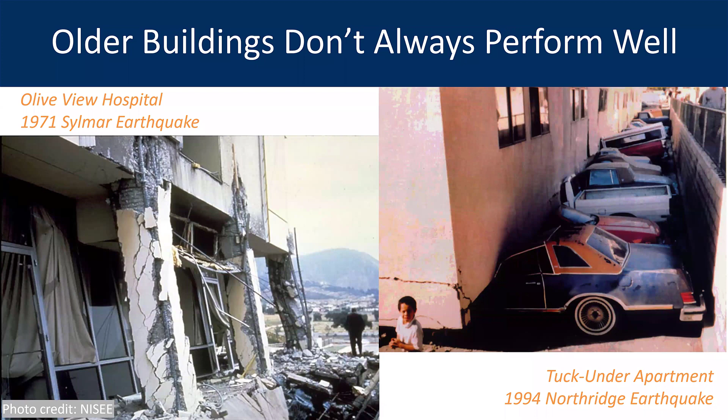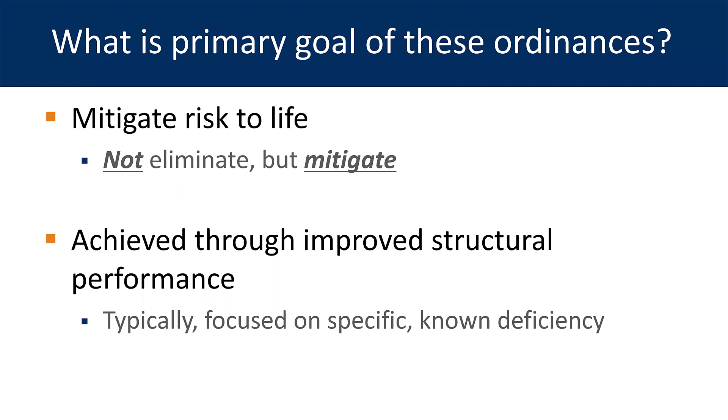The primary goal is to mitigate risk to life. It's not eliminating it, but reducing the likelihood of injuries and fatalities in an earthquake. This is achieved through targeted mandatory ordinances. It's looking at only certain types of buildings and also making sure that very particular defects or deficiencies in these buildings are addressed. So what do these ordinances not do?

It's not the intent of these mandatory ordinances to ensure the usability or economic use of an individual building after an earthquake. Instead, these aspects are looked at in aggregate from the community's point of view, and these benefits accrue to the community as a whole. In other words, on average, buildings are going to do better overall, but there is no assurance that any one individual building is going to be protected for continued use or from economic losses.

As a sidebar, there's nothing in the ordinances that prevents you from a retrofit design that brings you up to a higher level than what the ordinance requires. In other words, you may choose to do a more stringent retrofit that would allow you to continue to use the building after an earthquake or would protect you from these economic losses.

And so the few takeaways here help describe the context of a mandatory retrofit. First and foremost, they are there to protect the lives of people. There are regional benefits that accrue to the community overall from these retrofits that we will be implementing in the future. However, for individual buildings, following the retrofit requirements does not necessarily assure you of economic protection of that particular building.

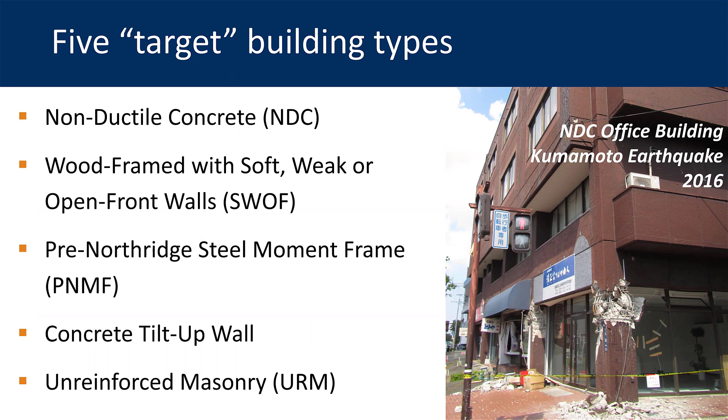A new category that is getting mandatory attention is called pre-Northridge steel moment frames. There are only 2 locations that have addressed that right now, but you should be aware that there are mandatory requirements out there if you have a steel building also. The latter 2 bullet points are what we would call the mature ordinances: concrete tilt-up wall buildings and unreinforced masonry buildings. Those mandatory ordinances have been out there, frankly, for more than a decade or so, and the legally required compliance dates have long passed on those 2.

So here in California, here's a listing of the jurisdictions that make up our patchwork quilt. For the wood frame structures, in Northern California, we have Oakland, San Francisco, Berkeley. In Southern California, LA, West Hollywood, Santa Monica, Beverly Hills, and Pasadena. For the concrete buildings, Los Angeles, West Hollywood, and Santa Monica have implemented mandatory ordinances in Southern California, but not yet for Northern California. They are under consideration there. The steel frame buildings have mandatory ordinances in West Hollywood and Santa Monica, and it's under consideration in Northern California and San Francisco.

Talk very quickly about the 2 mature ordinances here. As these other new ordinances have hit the streets, some jurisdictions have refreshed their old long-standing ordinances, in particular, Santa Monica. They not only changed the ordinances, but they are going through renewed enforcement for tilt-up and unreinforced masonry buildings. Similarly, in Southern California, the jurisdiction of South Pasadena has become aware that several URM buildings were never brought to full compliance, and they've stepped up with new enforcement in that jurisdiction.

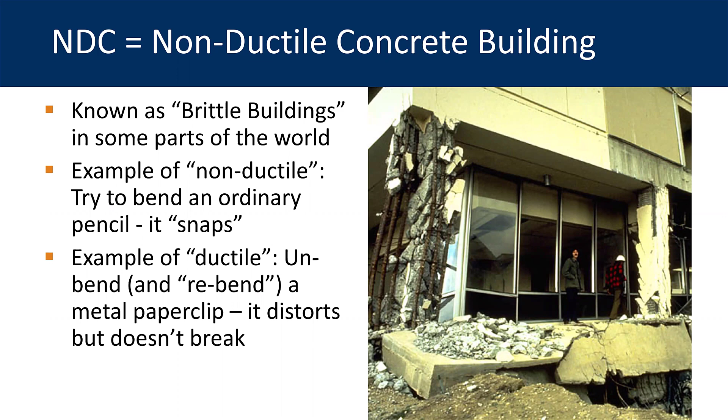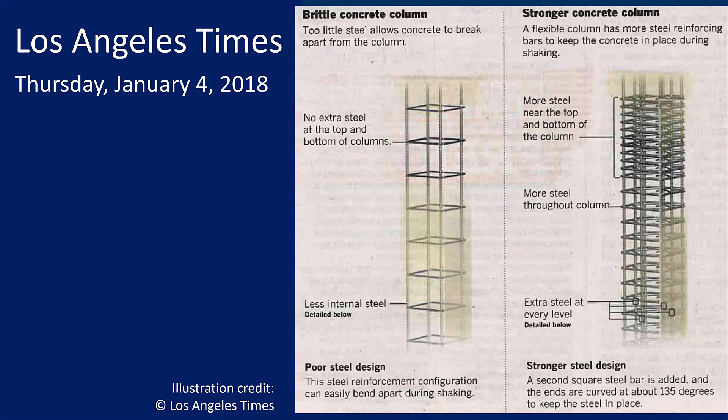It has a lot more vertical reinforcement and much more of these so-called ties. And it is the intensity of reinforcement in these columns that make them stronger and make them more ductile.

Now, what other potential physical deficiencies might be out there in your concrete building? There are frankly too many to describe or even to prepare a shopping list in detail, but you could have problems with your shear walls in addition to problems with your columns. You could have problems with the foundations or beams or girders. Even the floor slabs could be a problematic issue with respect to earthquake loading.

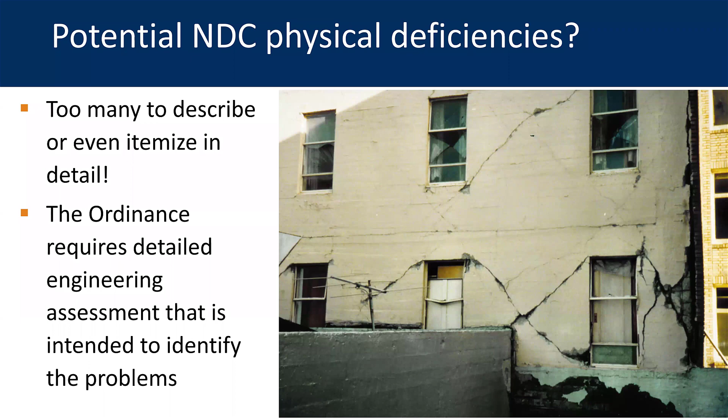And so it's hard to prepare detailed requirements in the ordinances to address these. And so instead, the ordinance requires that an engineering assessment be carried out according to national consensus standard assessment documents.

For the LA non-ductile concrete ordinance in particular, what buildings fall under the net that the city is trying to cast? First of all, look at the original building permit application. Not necessarily when the building was being constructed, but when the paperwork and the structural engineering drawings were filed with the city for a building permit application. The date on that permit application is an important benchmark date. For the city of LA, if that was before specifically January 13, 1977, then your building may be subject to this ordinance.

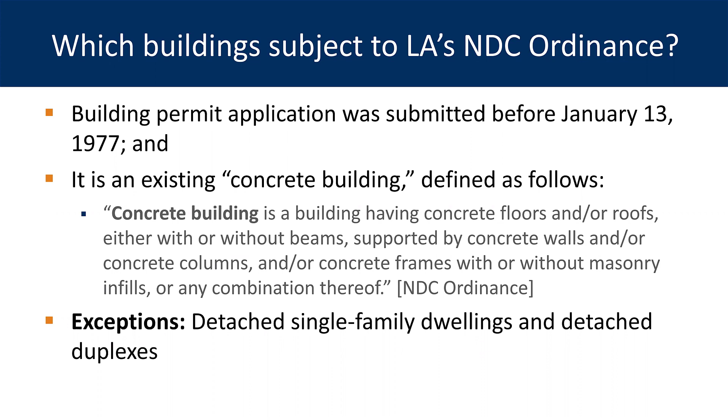If you have the reaction that there's a lot of and/ors in there, and particularly that last clause, or any combination thereof, yes, that's a very broad net they are casting, and the city is doing this by intention. There are a couple of exceptions, and it mostly involves, as shown here, detached single-family homes and detached residential duplexes.

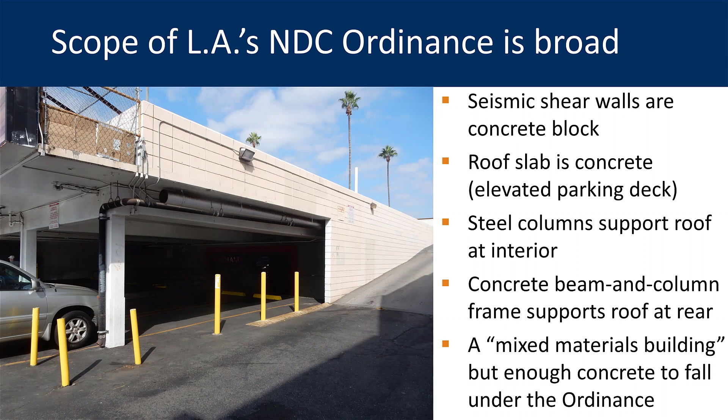In the back of the building, this is a concrete building version of a tuck-under parking. You can see the concrete beams and columns that support the concrete roof slab. And despite the fact that at the interior of the building where the retail occupants are, it's steel columns supporting the roof, there is enough concrete in this building that it falls under the scope of the ordinance. And so an important thing is these mixed material buildings. We have concrete block, we have steel columns. There's enough concrete in these kinds of structures that they fall under the scope of the ordinance.

There's also an opportunity given by the ordinance to run a detailed engineering analysis of the building as it is, and if you can successfully demonstrate it complies with the engineering requirements of the ordinance, you do not have to do an upgrade. Frankly, the older your building is, the less likely you're going to satisfy an engineering analysis by itself. And that's because with time, the codes have changed. And the further back you go, if your building was designed under a really old building code, it's not going to have the strong columns that you saw illustrated by the LA Times article.

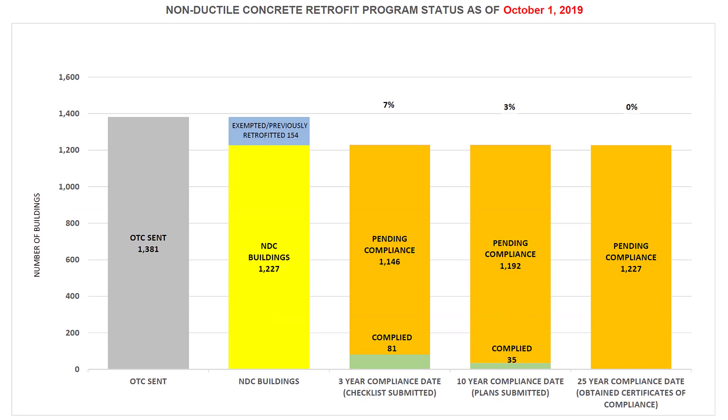So where are things at overall with this process? The graphic you see here is prepared by the City of Los Angeles Department of Building and Safety. It's publicly available on their website, and they update it on a monthly basis. This is the most recent graphic issued on October 1 of this month. The very first bar there, that gray bar, is the number of orders to comply that the city has sent out to concrete building owners in Los Angeles.

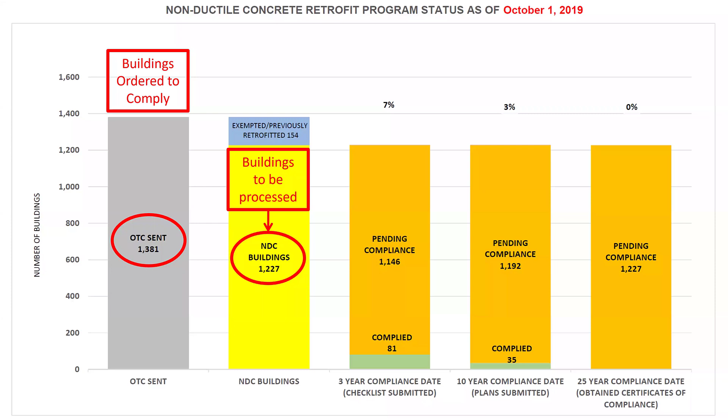They sent out about 1,400 orders to comply. To date, they've identified, in the next bar column here, the yellow one, that 154 of these buildings may have been previously retrofit or are exempted from the ordinance for various reasons. That leaves approximately 1,200 buildings that have to run the process of full compliance by retrofit or by demolition.

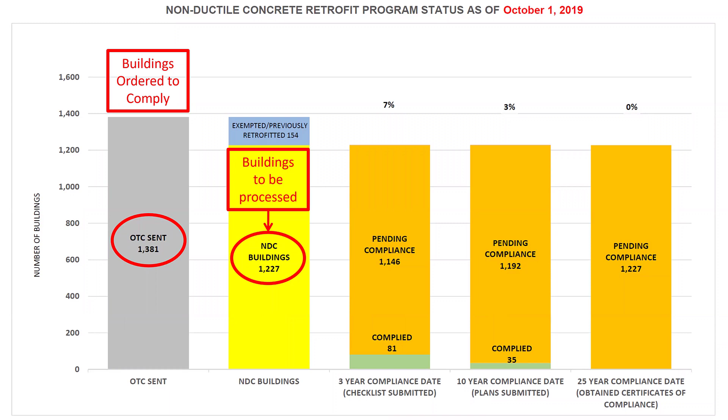Of that number, the folks who have completed the checklist is shown in the third bar chart. And this is the checklist progress at year 2 of 3 years. A total of 81 buildings out of the 1,200 buildings have submitted checklists to date. Now, if this checklist completion process were linear with calendar time, that number should be about 800 buildings, not 81 buildings. So what's the message here?

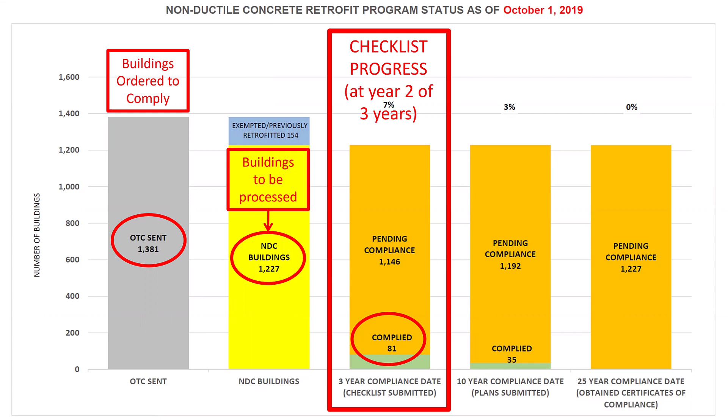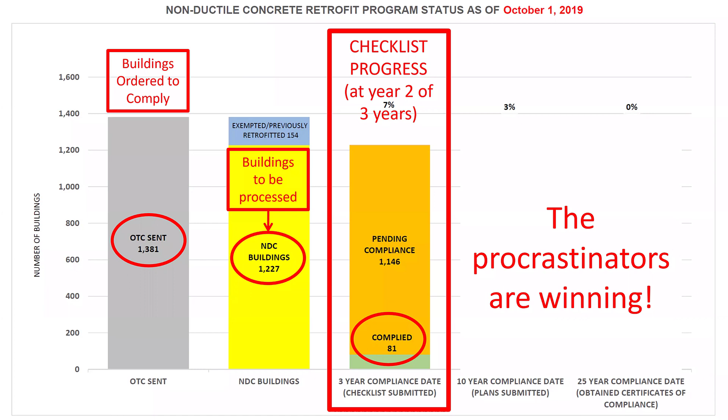The procrastinators are winning. There's going to be a logjam a year from now to achieve this compliance if folks don't realize what's going on here. So the takeaways: don't join the field of procrastinators. You want to be on the good side of the city in this process. The checklist is actually a straightforward engineering assignment, but still you can't procrastinate.

You probably have to identify an engineer to do it, then you have to get them under contract, and then you have to allow them enough calendar time to get the work done and the paperwork into the city before the compliance date passes for the first milestone. We're also recommending here that you combine this straightforward first task with some of the first steps towards achieving the 10-year milestone, and we'll discuss that in the next section of this presentation.

So what is this 10-year milestone? Typically, it's submitting the retrofit plans, including getting the retrofit plans and supporting structural calculations through the permit review process and getting your permit in hand. These bullet points are all nitty-gritty engineering stuff. It will most likely be performed by an outside consultant you retain. And most of these bullet points are steps along the path required by the ordinance.

There is an additional recommended bullet point in there, and it's the fourth one down. It's called Develop Conceptual Approaches to Retrofit and Pricing. And this step is recommended by us for you to develop some firm information about what are you going to physically do to the building and how much is it going to cost.

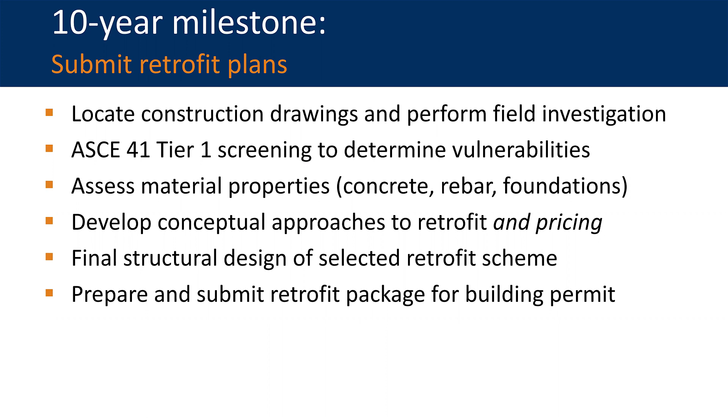The rules of thumb out there that people have been quoting in terms of dollars per square foot of floor plate and that kind of thing, they are proving to be wildly inaccurate. And they're wildly inaccurate in both directions. They understate costs and they overstate costs depending on the nature of your building. And why is that? It's because each building to be addressed under this ordinance is very unique, and each one needs its own custom approach to retrofitting. And so a simple rule of thumb does not exist. There is no such thing as one size fits all with repairing a concrete building.

Other considerations here: depending on the nature of the structural engineering aspects of this seismic retrofit, you might want to do some of the other items mentioned here. For example, add in cost estimating at conceptual design, so you have a rational basis for making your business decisions going forward. And that can happen fairly early in this 10-year process. You might want to undertake some other improvements at the same time. You know, maybe the elevators need updating, or new ventilation systems and air conditioning, that kind of thing.

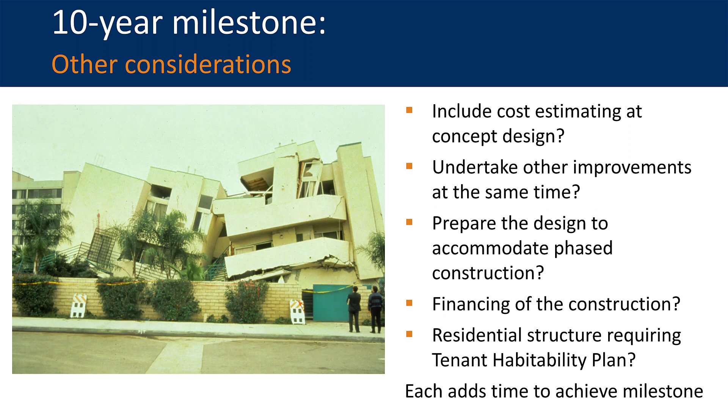Maybe you want to take the retrofit construction as a phased approach. And so that phasing needs to be shown on the documents that are sent out for permitting. And what about financing of the construction? That's in your folks' bailiwick, and you know the timelines involved with that much better than I do. And then in the end, if you have a residential structure, you'll have to deal with tenant notifications and a habitability plan. Each of these adds a length of time to this milestone.

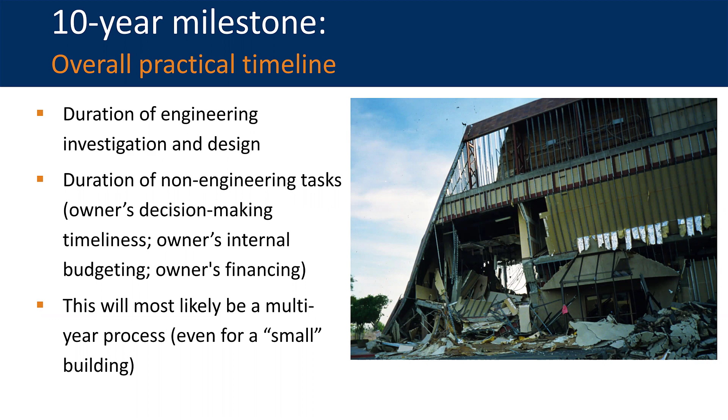Now, what about the overall practical timeline for this kind of thing? You already heard me say there's no one size fits all and no rule of thumb for prices. The same thing applies to the duration for achieving this milestone. In the end, this will most likely be a multi-year process, even for small buildings.

So the main takeaway here for the 10-year milestone is get going right now. There's only 1 year left to complete the Los Angeles NDC checklist, and there's only 8 years left to achieve the 10-year milestone. And you can do both at once. Complete the checklist and take these first initial modest efforts towards the 10-year milestone right away.

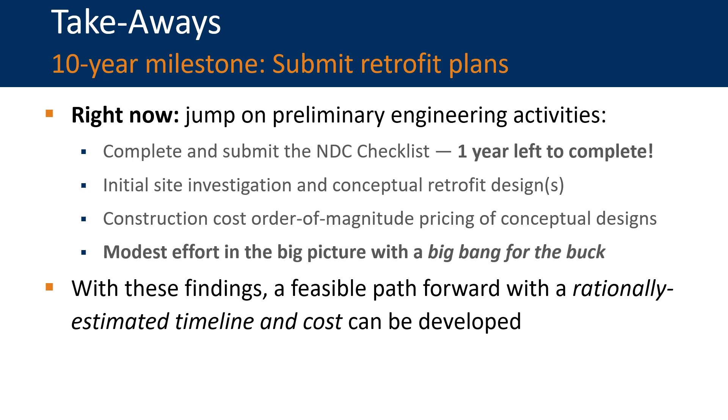And these modest efforts will likely pay off in the long run because you'll get a rational estimate of both cost and timeline from these concept designs and the construction pricing of the conceptual designs. And that information will allow you to go forward for the rest of the 10-year plan and for the 25-year construction milestone to proceed in a rational fashion.

So what about this 25-year milestone? Well, it's physically constructing the retrofit. You need to have the retrofit fully done and your updated certificate of occupancy in hand, in other words, the full compliance certificate by the end of this 25-year milestone. Frankly, it'll be driven by the complexity of the project and the construction duration for that.

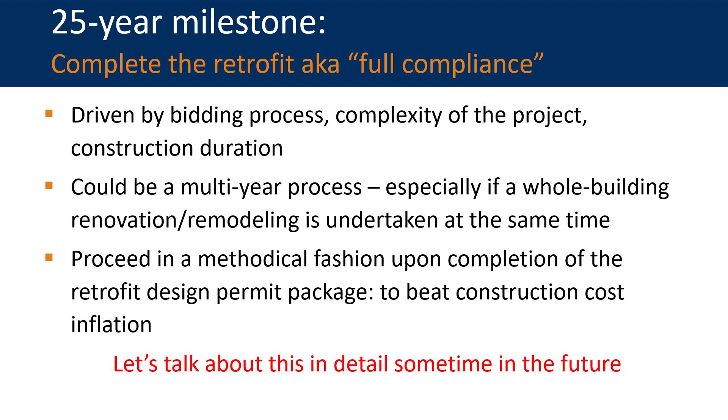If you have a larger building, or if you're going to undertake, for example, a whole building renovation at the same time, it'll be a multi-year process. But once you get permit in hand, you should probably proceed into construction in an orderly fashion, because you'll want to beat construction cost inflation. For the 25-year milestone, that's about all we'll have to say today. It indeed does seem like an ample timeline has been permitted, and we'll perhaps return in a future webinar to talk about this in more detail.

As we mentioned before, the order to comply transfers with the ownership. It persists with the original timelines that started when the order to comply was issued back 2 years ago. And you could find it of benefit in the long run to know at least order of magnitude costs, rough costs, but rationally developed, that will help you wrap your head around how much these retrofits will cost. And in the end, talk to the other folks in your professional network to see what their experiences are.

There are some property transfers that have happened already to buildings that have received the orders to comply. One of my clients told me frankly that the order to comply had absolutely no effect whatsoever on the real estate transaction. Other clients have reported otherwise. Overall, the ordinances are indeed a patchwork quilt, and you need to find where your patch is in that quilt. You need to know the jurisdiction and their ordinances, and you need to know your building. With that information, you can figure out whether your building falls under a mandatory ordinance.